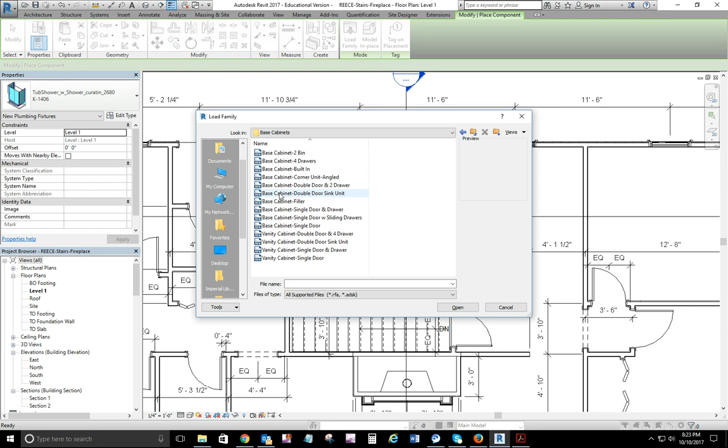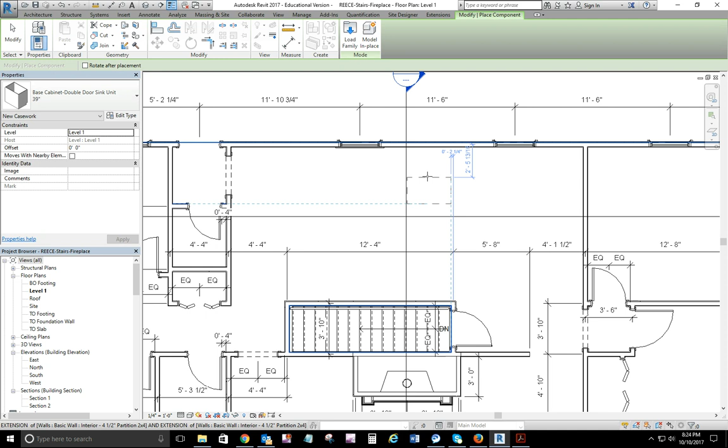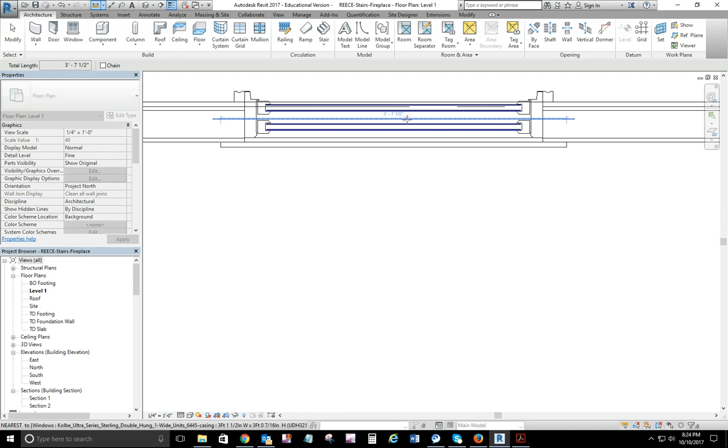36 - well, I had a 36 in the other file. Let's go ahead and go with a... let me measure the window here and see what we have. What is that, 3'7"? 36, 42, 43 and a half. And that's a 39.

Just a kitchen design is fun. Let's go and change it to a 42, and then we'll pull it over here.

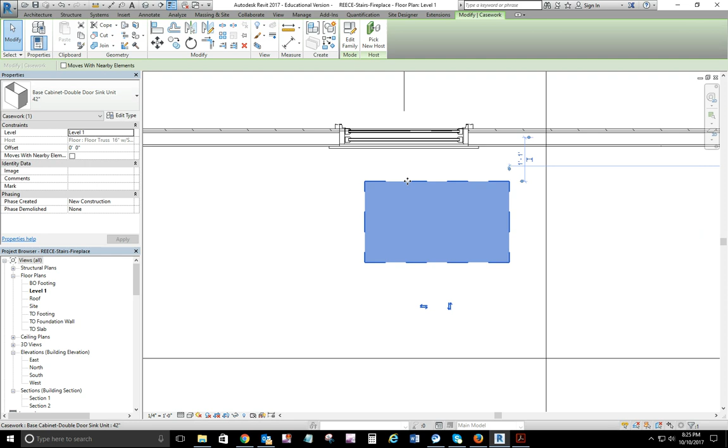Now, it's hard to tell with these when you first bring them in, but that should be the back of the cabinet. Let's go to the section view just to make sure. Yes, all right, so here we see the doors. Okay, so we're good there.

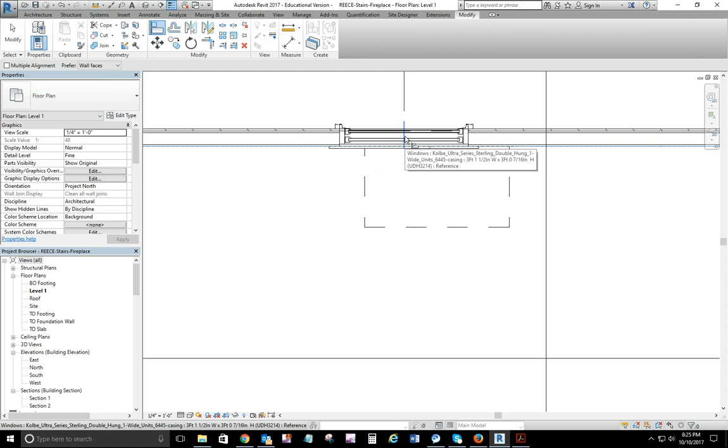So now what I do when I bring them in is I align them. I just drop them in on the floor, and then I do my alignments - I'm going to align it to the face of the drywall to the back of the cabinet. And then I'm going to go center of the window, center of the cabinet. And that gets my sink base in place.

I changed that one to a 42. So let me go back and look at my other - there I had a 36 and a 24.

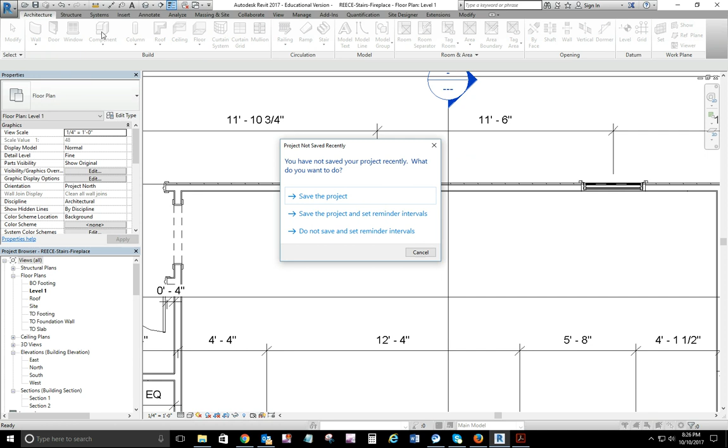So let's pull in a couple more families: casework base cabinets, double door and two drawer unit. Yeah.

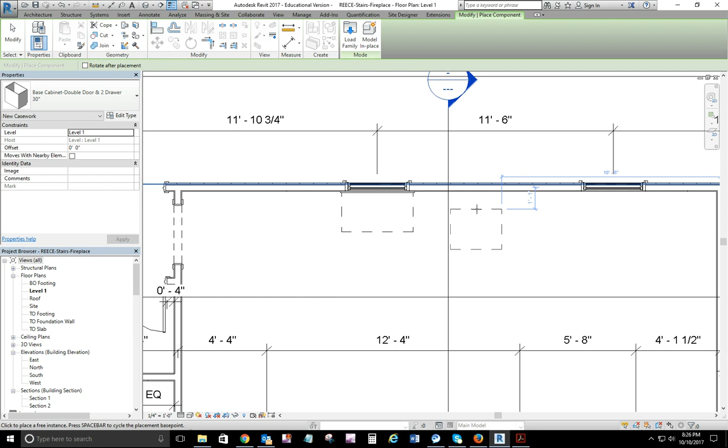Let's change that one to a 36, and I'm going to drop it right there. And then I want a drawer unit over here on the left side.

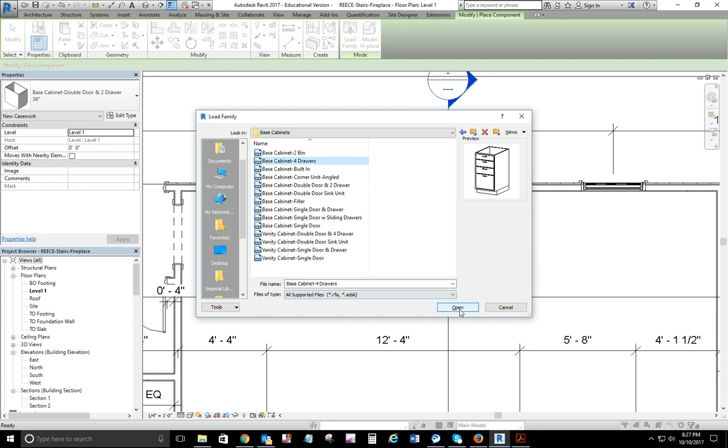Base cabinets, 4 drawers, and let's go with a 21 to start with. Okay, and so I'll put them in and align them.

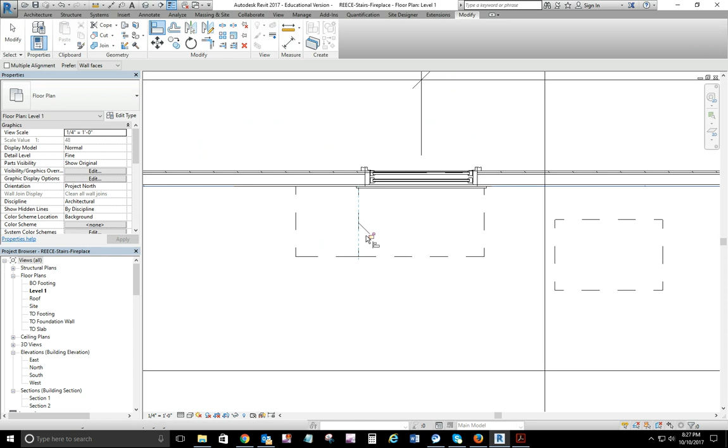Okay, let's see what we've got across here - 8'3". Let me check my other drawing. That's what we had. Of course, that one moved on me.

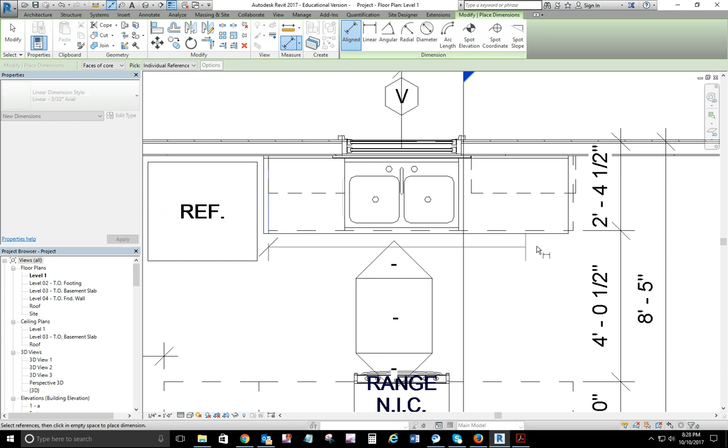Pull that back in. Okay, so let me measure this one now and see - 8'5". Okay, I think we can probably work with the 8'3" across there. We'll see how it goes, okay?

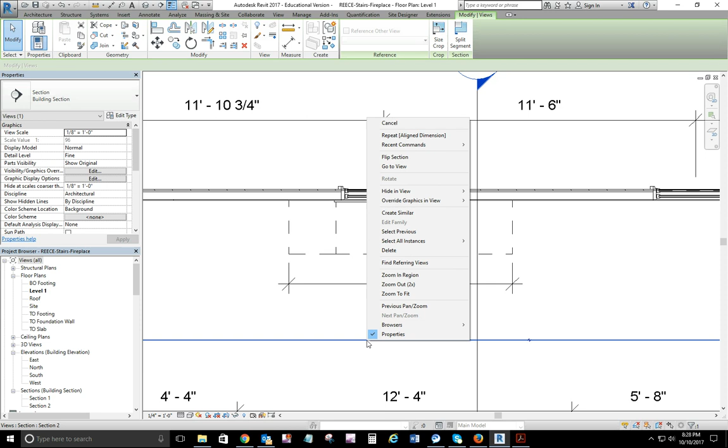Okay, so I've got those in and I've got them locked in place, okay? Let's go to our view. Looks good there.

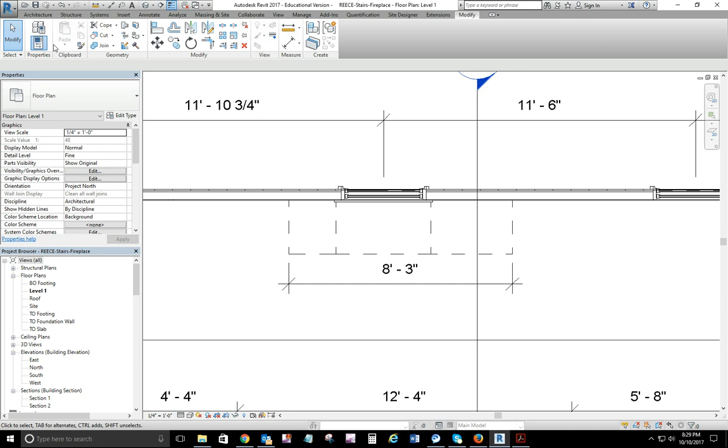Okay, so now we would put a countertop on it, and so we'll have to load that family - countertops. Countertop with a sink, you can do it with a sink, you can do it with a sink hole, or no sink. Okay, so it depends on what kind of shape and what you're dealing with. We are going to put a sink in it, so we might as well go with countertop with sink.

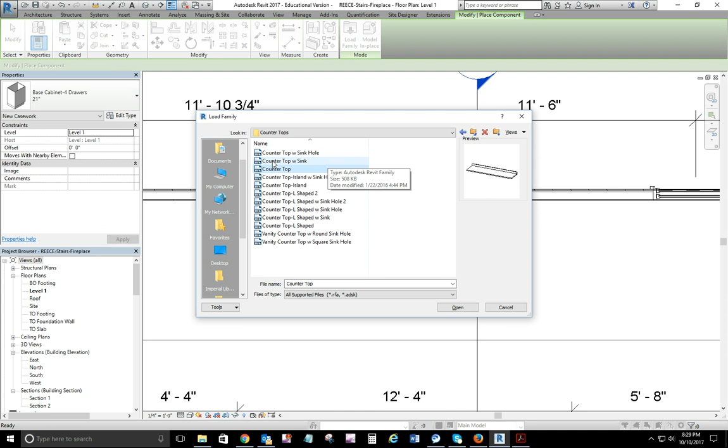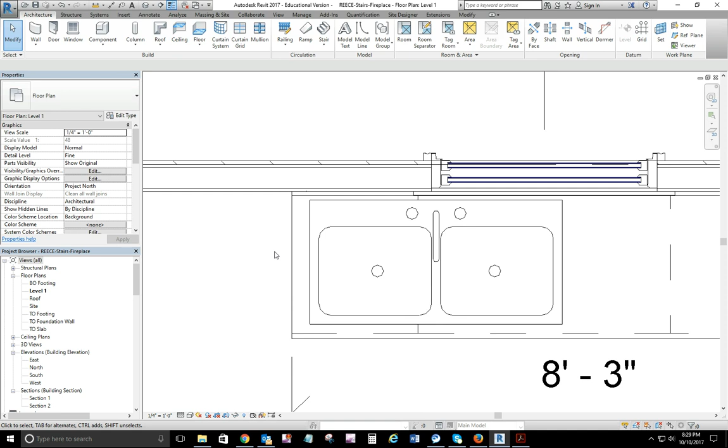So I can drop that in place. Now, funny thing with these openings and sinks is usually you just can't click and drag it.

So I find it better to work over here in the properties. And I'm not going to lock that one in place yet. I can align it back against the wall - countertop, okay. Because we may end up changing sizes of countertops. If we change our cabinets, we need to change that.

Okay, so my sink opening - let's see, sink location is 2 feet, location wall 6 inches, opening depth, opening width. Okay, so these things are fine. It's the location right here - it's listed as 2 feet. Well, that's from the edge to the center. I need to know what we have edge here to center here. 3'6". Okay.

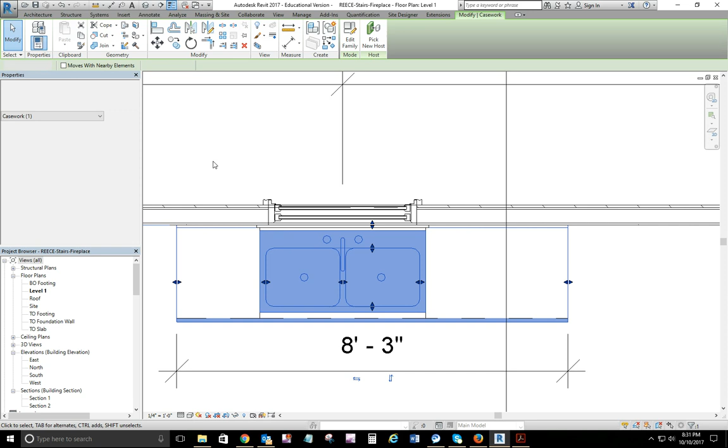Okay, so that's looking pretty good right there. Let's go to our view, check it out. All right, so that looks good. Everything's centering up nicely.

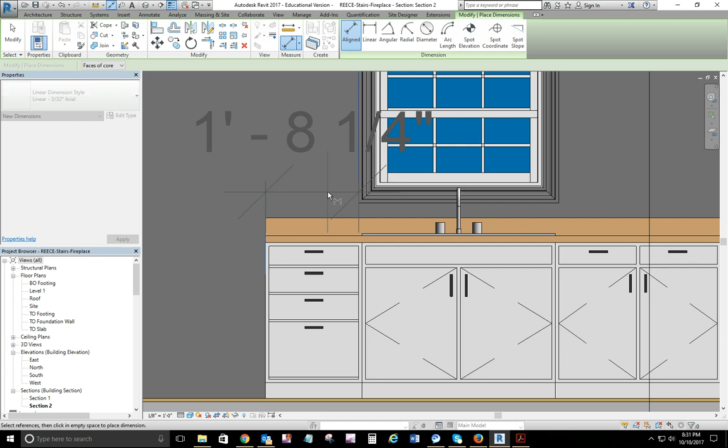Now while we're here, let's pull a dimension there. We got 1'8" there and a quarter, so we could do a 1'8" wall cabinet on that side. Here we've got 2'11". That one might be a little interesting.

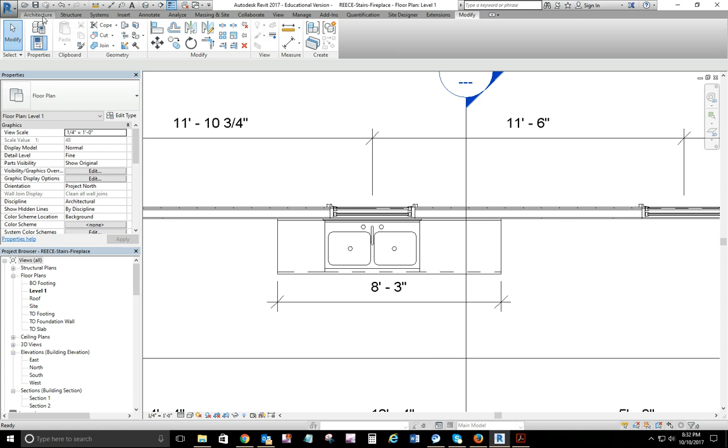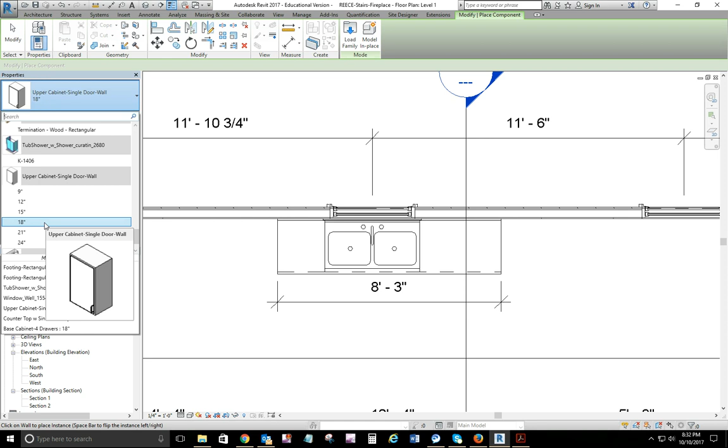Okay, so now we'll load some wall cabinets. Upper cabinet, single door. I think a single's all we're going to be able to do on the left side because we had 1'8", which is 20 inches... 21. So we're going to have to go with an 18-inch one because 21 it's kind of big, it's going to hang out. So we'll go with the 18-inch.

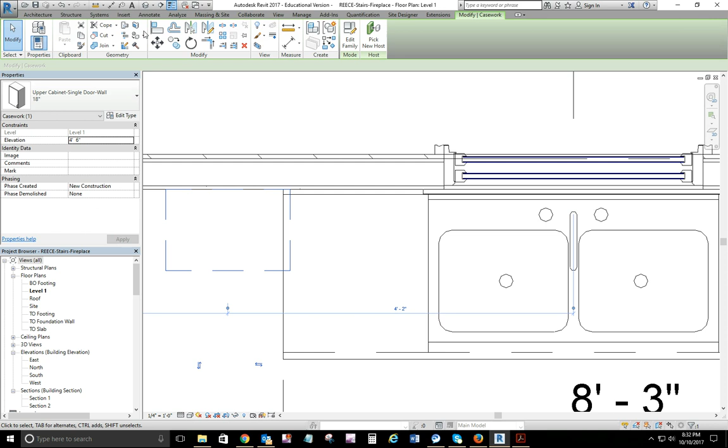And I'm going to drop it right there, and we'll do the alignment. I want to align it to the wall. And then I want to go to, not the end of the cabinet, I want the cabinet, not that. So let's temporarily hide that.

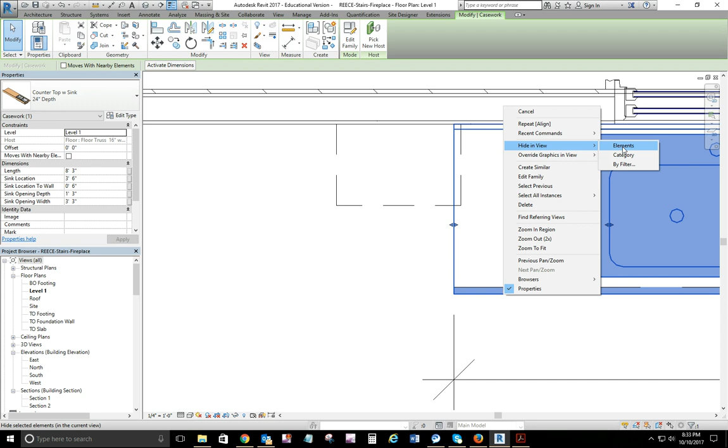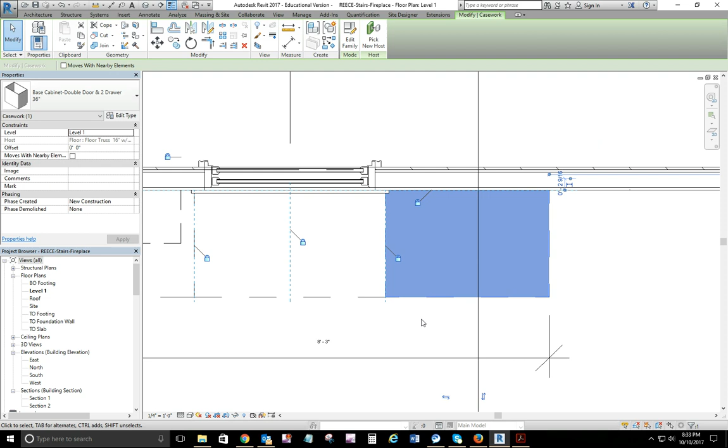Okay, and so now we've got a 36-inch, so we'll have to go with a 33-inch cabinet over there to make it work right. So let's do that.

Cabinet double door wall. And I forgot what I was saying, a 33-inch.

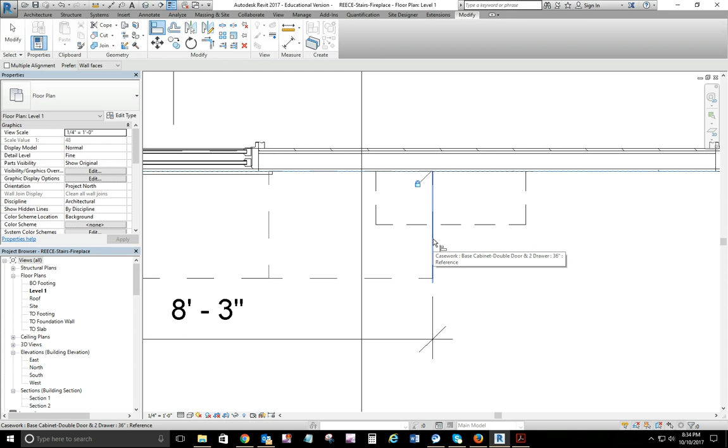Yeah, because we're not going to get another 3-inch space in there into that trim. Okay, now I can bring my, unhide my countertop.

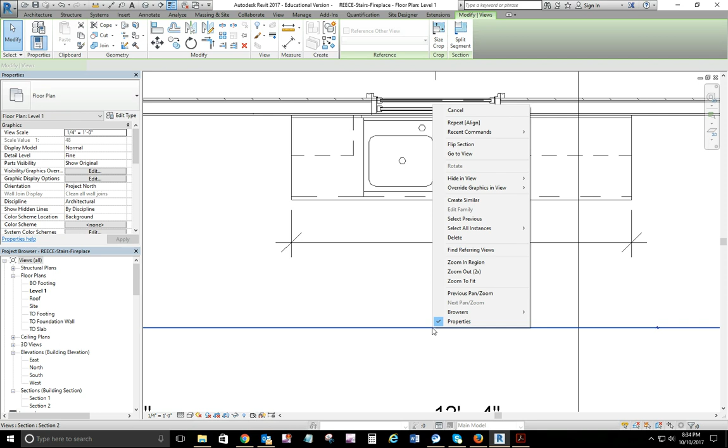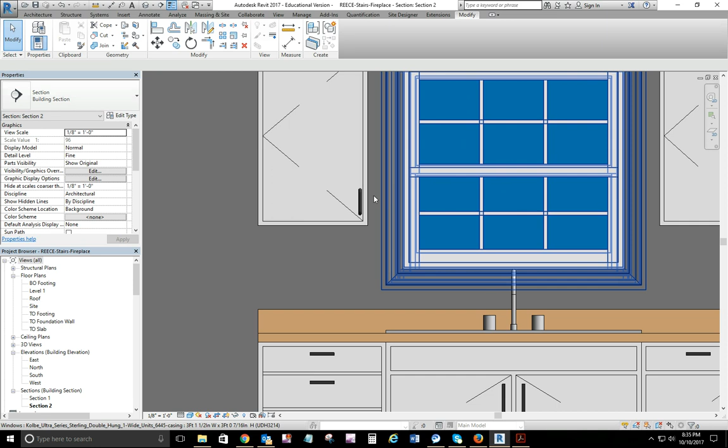Okay, and so that's looking good. One thing to check on these is make sure you got 18 inches between top of countertop, bottom of cabinet. That's kind of the norm. If we had smaller casing, we could go with the next size up, which we could make smaller casing. That would work.

Okay, as for the cabinets here, I'll put a list of sizes into Blackboard as soon as I can on what we're going to do, and then, oh, that's not what I wanted.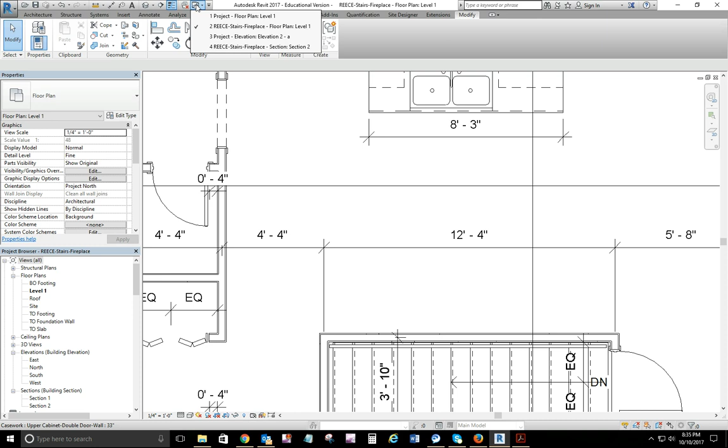What we're going to have to do is put a wall across here, and that means we're going to have to go back and adjust our ceiling in this room to cut out for it because we got wall cabinets that are going to come in there, and we want an interior, or 4.5. Is that what I used?

Okay, so I want to put a wall across there, an interior wall, same thing that we had before. And I'm going to pop it right in there for right now. I will give you the sizes that we're going to need.

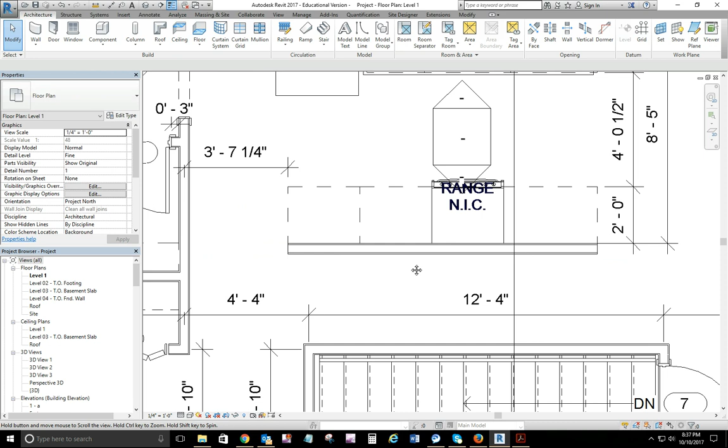If I pull it up here, it'll take me a little bit more working to get the exact sizes that we want. But then let's pull a dimension from wall face to wall face. We got 3'2" and 3/4.

3 foot's the minimum, 3'6" is better. Let's see, what do we have across here? 3'2" and 3/4. Yeah, that'll kind of work. I think those will work okay.

Let's go with a center of core dimension, see what we got there. Okay, so we'll make it 3'6". Center core, center core. Yeah, I'm not happy with it, but...

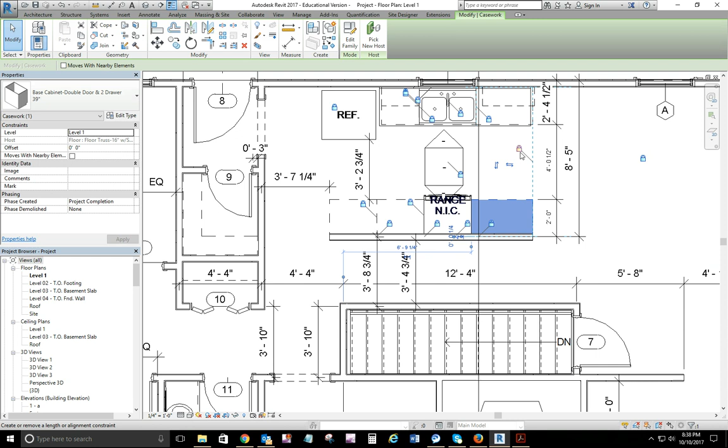If we make it 3'8"... oh, that didn't move my cabinets because my cabinets are locked. Or did it? No, I didn't move my cabinets. I got my cabinets locked here somewhere. I'll play with it some more.

Anyway, we're going to put a wall across back here, and it will pop these cabinets and range against it. That way we can put wall cabinets up here also. So I'll post the dimensions that you're going to need for that, and an image, in Blackboard, and then you'll be able to see that.